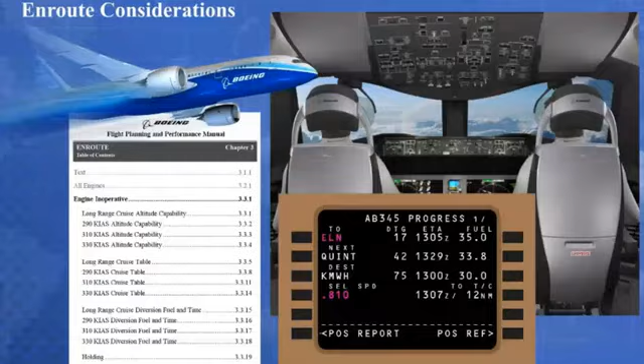Enroute considerations. Although there are typically no unique en route procedures required during an ETOPS flight, the flight crew's responsibility for monitoring the airplane's position, fuel, and system status takes on increased importance.

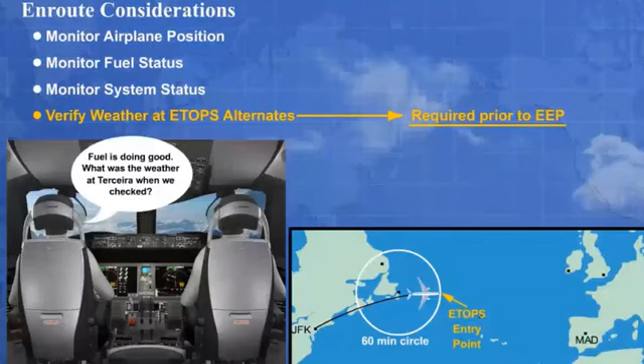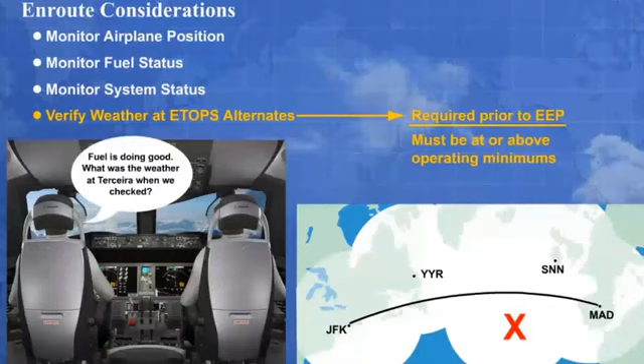The flight crew must also confirm the weather status at the designated ETOPS alternates before passing the ETOPS entry point. If alternate weather conditions are expected to be below operating minimums during the required validity period, the flight crew should coordinate with dispatch to determine a new ETOPS alternate and/or reroute the flight. An updated flight plan should also be produced.

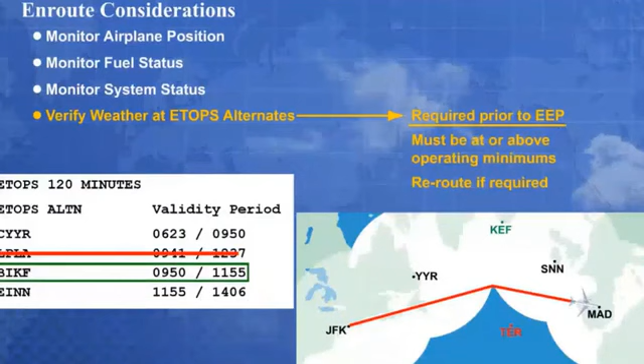It is a good idea for the crew to continue monitoring alternate weather as the flight progresses. However, there is no requirement to reroute if an ETOPS alternate becomes unavailable after the flight has entered ETOPS airspace.

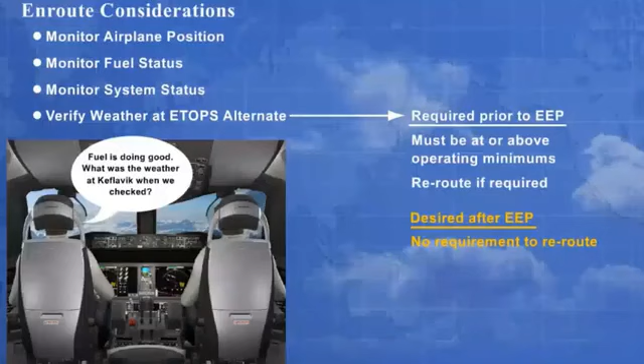As with any other flight, if an event does occur on an ETOPS flight, the flight crew must make a decision whether to proceed, divert, or turn back. The crew is not bound by the ETOPS rules to any specific course of action. They must evaluate the situation and take appropriate action based on the actual circumstances.

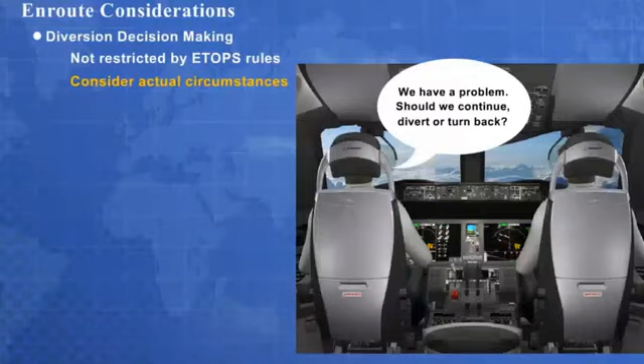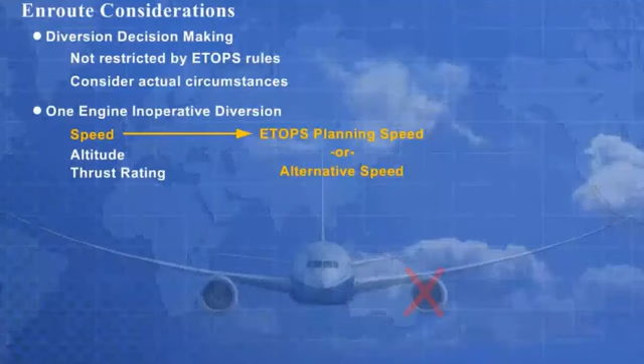For an ETOPS diversion due to an engine failure, the flight crew must determine the best speed, altitude, and thrust rating for the engine inoperative flight to the alternate. Normally, such a diversion would be flown at the approved ETOPS planning speed. However, the crew may select a different speed if judged to be a better choice for the prevailing operational conditions.

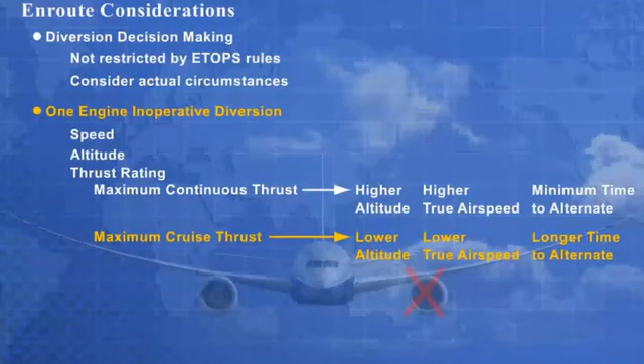If time is the greatest concern, the decision might be to fly at maximum continuous thrust at the highest altitude possible. If time is not the greatest concern, the decision might be to fly at maximum cruise thrust, resulting in a longer diversion time and a lower cruise altitude.

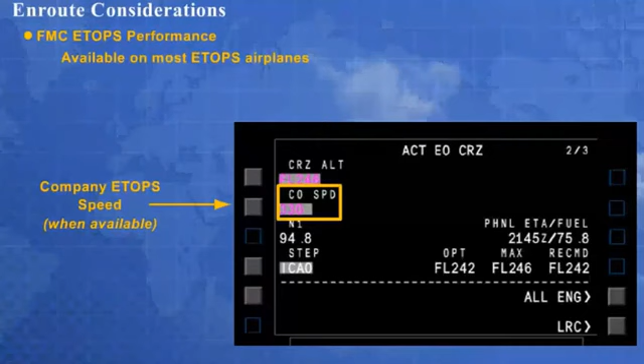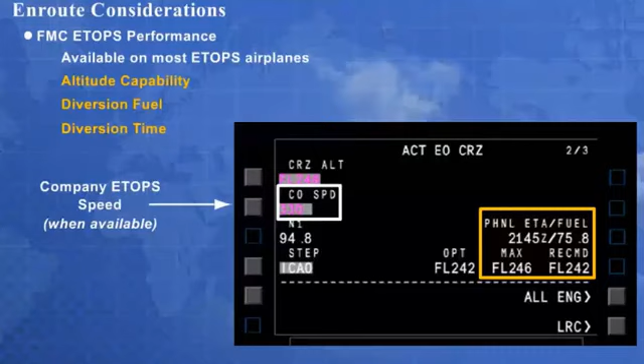The FMC provides ETOPS engine inoperative speed guidance on most ETOPS airplanes. The FMC ETOPS performance predictions, when available, include engine-out altitude capability, as well as diversion fuel and time required to the selected alternate.

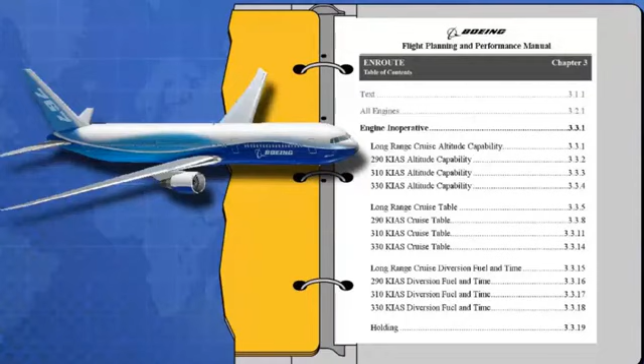This information may also be available in Chapter 3 of the Flight Planning and Performance Manual, or from manufacturers' supplied performance software tools.

For airplane models with an FPPM, Chapter 3 includes charts to determine engine-out altitude capability, diversion fuel, and expected cruise performance for a range of ETOPS speeds.

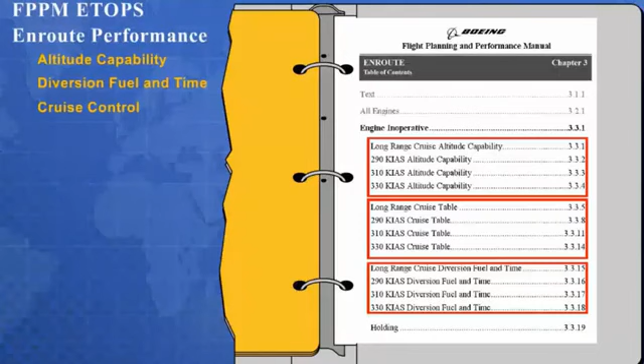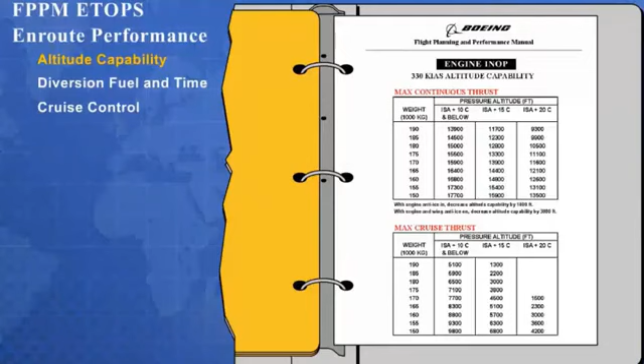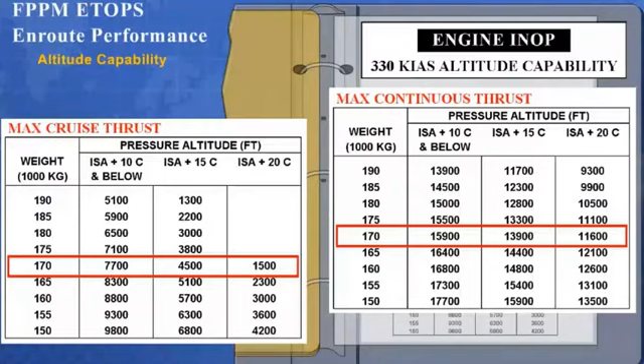Altitude capability charts are provided for both maximum continuous thrust and maximum cruise thrust. Note that the effect of thrust selection can be significant. This should be taken into account when deciding on a course of action. The altitude correction for anti-ice bleed should be considered as well if icing conditions are expected.

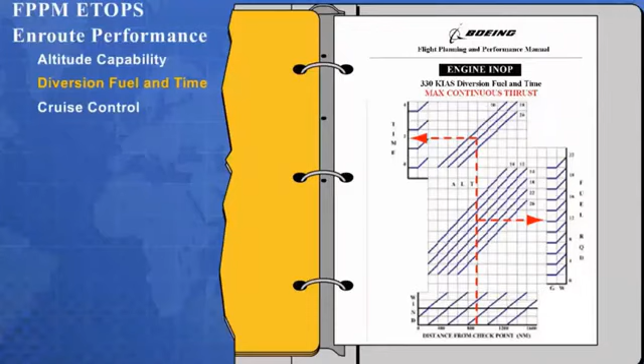The FPPM also provides one engine inoperative en route diversion charts. These charts allow the quick calculation of diversion fuel and time required for different engine-out cruise altitudes.

The critical fuel scenario check in the flight plan ensures that fuel should not be a concern if the diversion is flown at the approved ETOPS planning speed, and the diversion is to the closest ETOPS alternate listed in the flight plan.